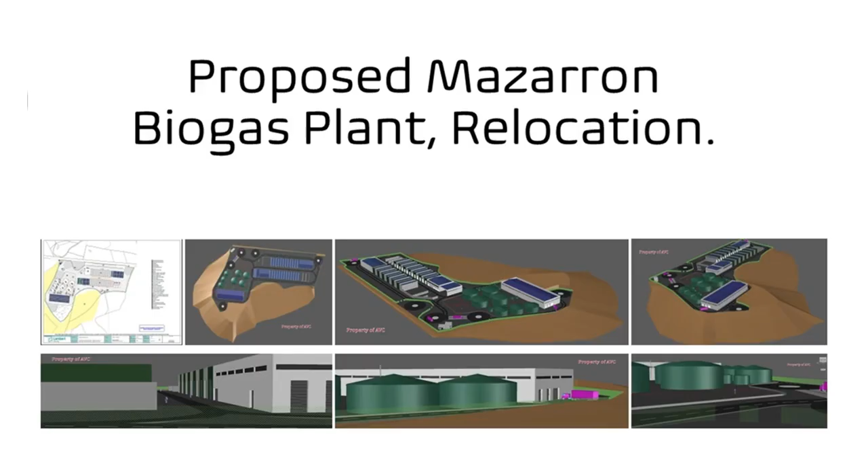The proposed location to construct and operate this biogas installation is far from suitable. The site is located within land deemed within the boundaries of agricultural only operations, not to be used for heavy industrial nor commercial use. This would violate local planning and sustainability regulations, and agricultural or green belt land should not be used to develop in this manner. Once one industrial complex, i.e. the biogas plant, is constructed and implemented, this sets a precedent and opens up possibilities of promoting further industrial and commercial activities in the same vicinity.

From the plans and documentation seen to date, there has been no thought nor consideration to shielding or screening of the site from all aspects of the surrounding countryside. As this installation sits atop a hill, the plant will be dominantly visible for miles around from all directions. A new location must be sought, as the plant lies just 1.15 kilometres from the closest urbanisation of Camposol Sector A.

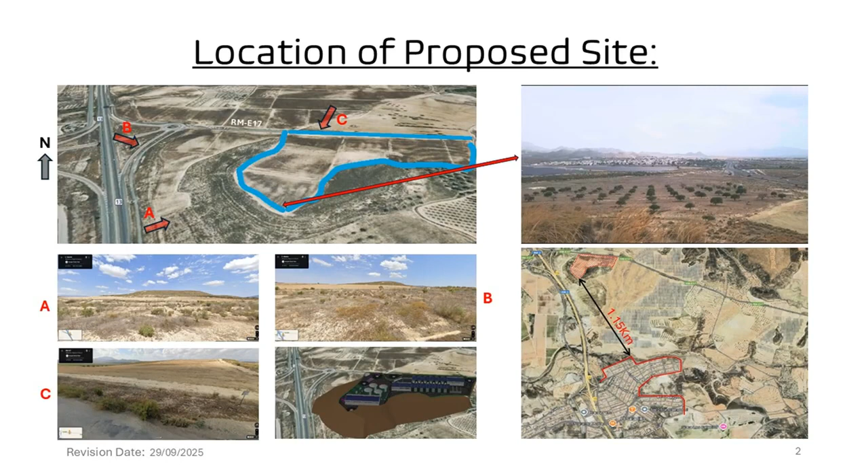Operational disturbance: light, sound, smell and odours. Excessive light. If construction is achieved, other disruption will be created once production commences - excessive light pollution and excessive noise disturbance. The plant will run 24 hours a day, 365 days a year. Every night, large floodlight masts will produce very bright light pollution to the night skies. These lights, like football ground spotlights, will be seen for miles.

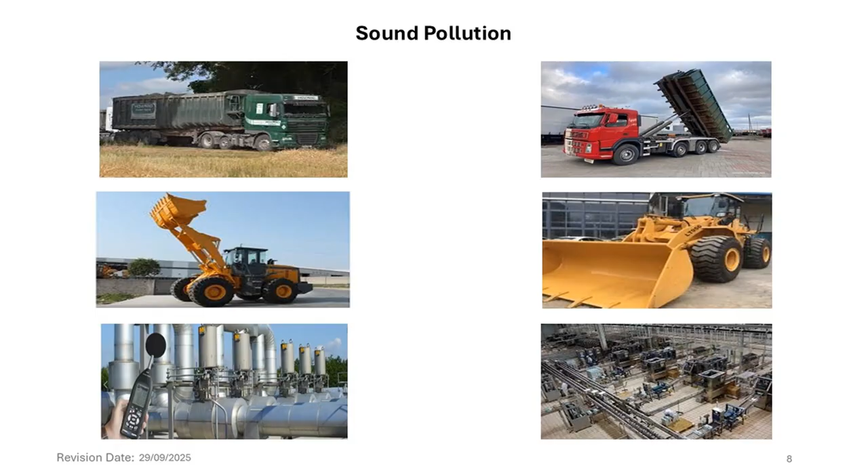Excessive sound will be generated from lorries, front loaders, reversing beacons, and general operational noise from generators, mixers, etc. Although noise calculations and metered tests have been completed in the design specifications, this is just an estimate of the total daily operational noise that will be generated, not the actual volume. In reality, the total amount of extra noise that will undoubtedly travel on the wind will be a significant disturbance for all the residential areas that lie within that wind direction. We all agree that sound travels across the plains of Spain.

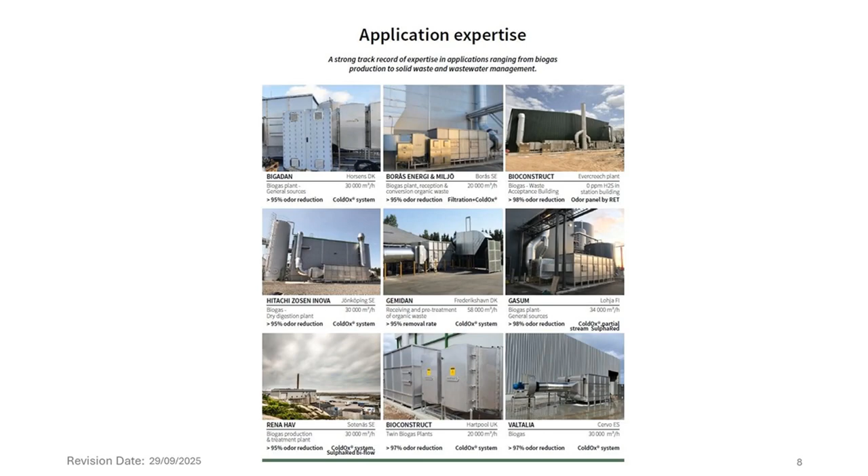Smell and odours: to date, I have not received any drawings or documentation that show or describe the building's internal air replenishment, scrubbing and odour control ducting to be installed to eliminate foul odours and hazardous gases. If these odour control systems are installed and the plant operated correctly to specification, then there should be very minimal to no smell to consider, unless by way of accident or general power failure. The image on screen shows some examples of odour control systems installed by a very reputable company that's been doing this for a very long time, and once these systems are installed, it removes all odours and gases - they get scrubbed, cleaned and release almost fresh air.

Increase in resource usage: potable water and electricity. If this plant is approved, constructed and implemented, daily operations will devour copious amounts of potable water to add to the feedstocks in the digester tanks, as well as for other activities on site like spillage clean down, safety showers, and firefighting.

There is a grave concern as to the total amount of potable water this plant will consume. This feed comes directly from the main fresh water supply that feeds some urbanisations and local villages. Camposol already suffers from a low water pressure issue, and adding extra industrial demand upstream of the urbanisation will only aggravate this problem.

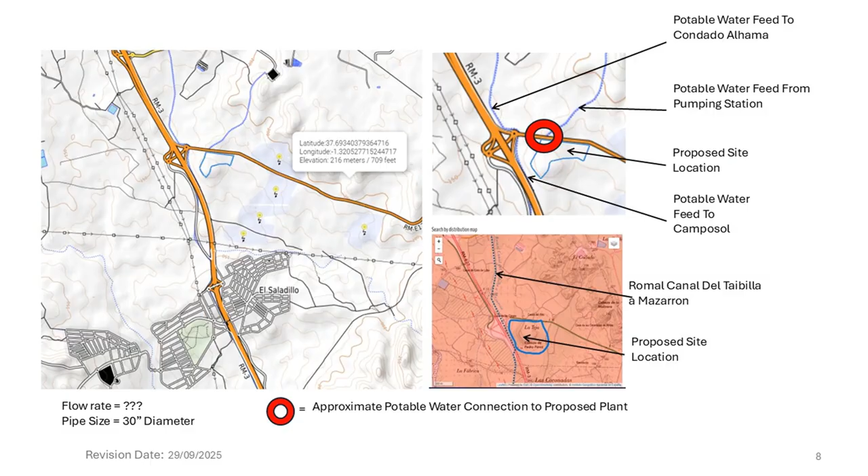Electricity: although this plant has many on-site solar panels to help with its operational electricity consumption, it will also use some of its self-produced biomethane gas to heat the digester tanks. But the plant will still require electricity from the local substation. A 20 kV electrical spur and new power line is indicated on the supplied documentation.

Should another local or national electricity blackout occur, how is this plant going to continue to operate safely? Will there be backup generators on site to supply power during a blackout or grid failure? And will these generators be silent running, so as not to add to the already increasing decibels in the vicinity?

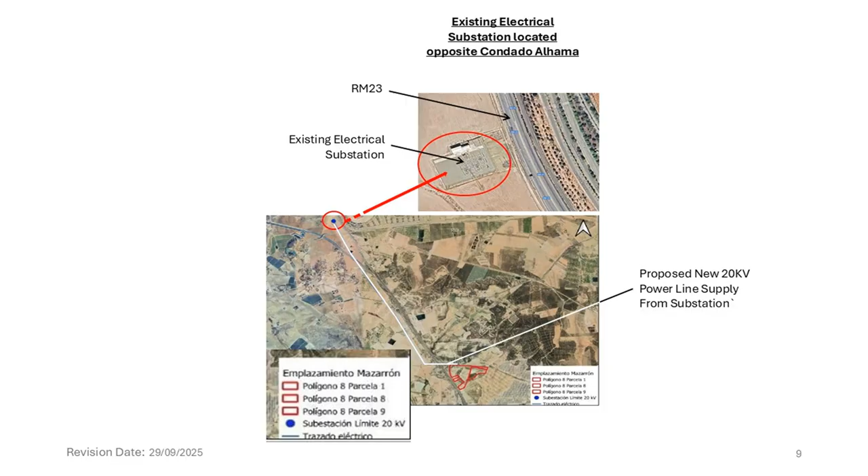As we can see in the image on screen, we have a small local substation. The image below shows the new power line spur feeding the proposed plant.

So 70 lorries, estimated by Lamberts to be arriving and leaving the site per day, could produce roughly 88.2 kilograms of CO2 per kilometre travelled. The estimated travel distance is 12 kilometres from RM3 junction 25 of the AP7 to RM3 junction 13 at the site, and also 12 kilometres from RM2 junction 4 to RM3 junction 13, the site.

HGVs are responsible for more than a quarter of greenhouse gas emissions from road transport in the EU, and over 6% of total EU GHG emissions. The first ever EU-wide CO2 emission standards for HGVs were established and regulated under this EU regulation.

Regulation 2019/1242, which sets a 15% reduction target by 2025, was adopted in 2019. These standards apply to heavy lorries over 16 tonnes with standard axle configurations, which account for approximately 70% of the CO2 emissions produced by all HGVs. The amendments to the regulation entered into force on 26 June 2024.

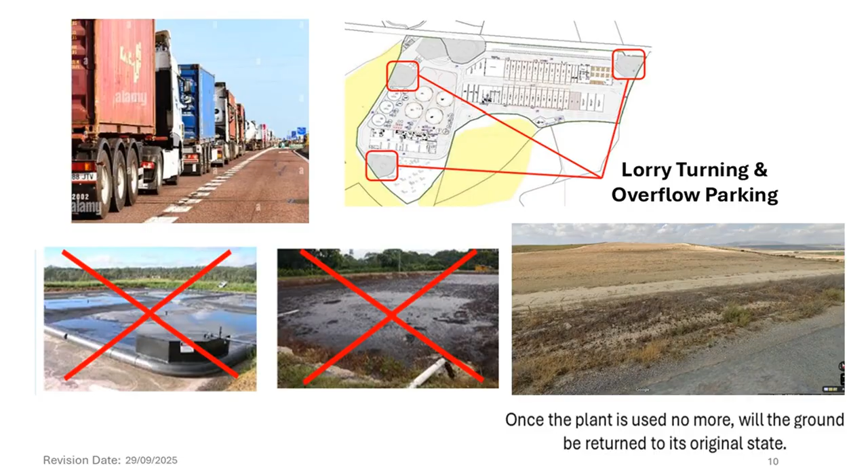Emergency processes and responses. Fire protection and spillage containment. Will this proposed facility have a fire protection ring main around the site? Will this site have an independent fire tender and qualified firefighters to handle any unforeseen fires and or explosions, product leaks or unplanned hazardous gas release?

Are there safety showers on site within the access around the site to shower if an unplanned, unexpected release occurs? Is the perimeter of the proposed site bunded to contain any unexpected product release and eliminate any risk of surrounding ground contamination, making clean-up operations easier?

The plot plans show storm drain infrastructure installed at the proposed site. Will this infrastructure have contaminated matter collection and cleansing of water for reuse, or will any storm water be collected and reused in daily operations?

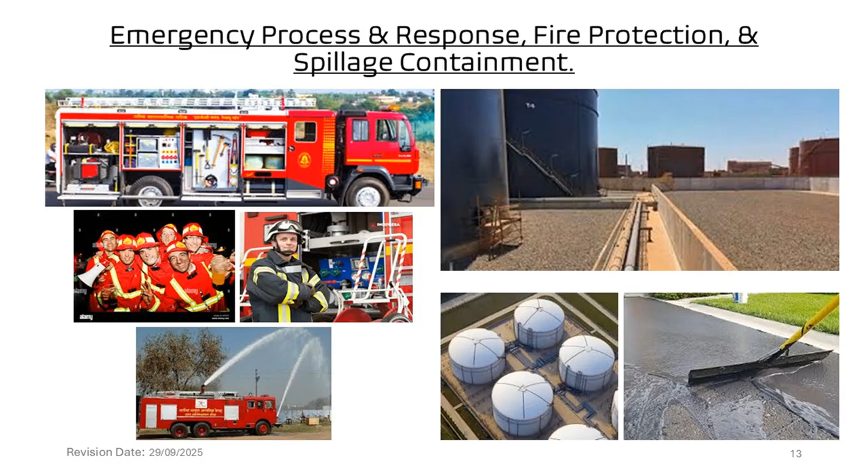Compensation to local councils or residents, farmers for plant acceptance. A biodigester plant is an excellent addition to a green cause for producing biogas and fertilisers from existing waste products. The plant proposed for the Mazarrón area will clean up the air and waste from pig farms and arable farms alike. If local farmers supply their waste for free, do they get in return fertiliser for free or at a discounted price? As for local residents, how will they benefit directly from having a huge industrial complex on their doorstep and having to endure the side effects of this operation?

The gas products produced here in Mazarrón are going to be sent up the line to be sold to other regions of Spain and maybe even sold internationally. This is great for the residents that live in cooler climates around other regions of Spain, but the good residents of Mazarrón will not benefit anything in return for the plant being built here. Other than a few permanent jobs, a majority won't benefit from gas nor fertiliser.

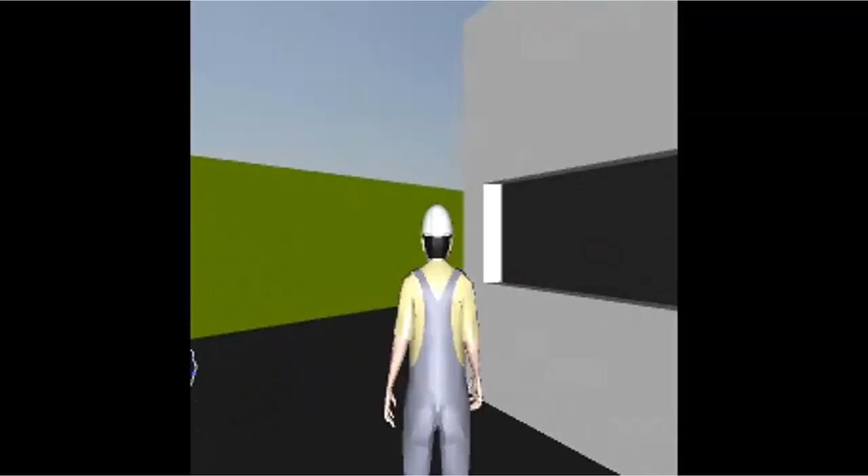This is a 3D animation to give you scale of a walk round of a finished plant. As you can see, the digester tanks are huge. There are an existing proposed 4 digesters with a proposed expansion of an extra 2 digesters on site.

The avatar is now looking at the feedstock arrival processing building. This should be hermetically sealed and the air replenished from scrubbing air conditioning. As you can see, it's quite a large reception building.

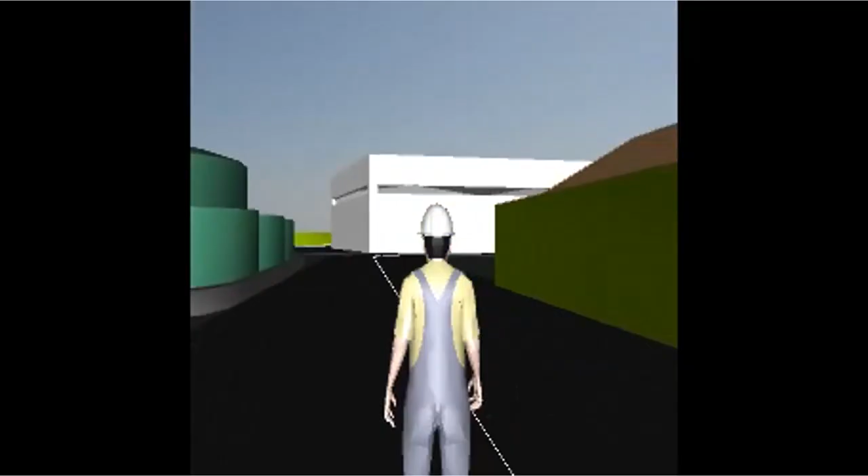Okay, we're arriving at the finished dry fertilizer storage pens and yards. As you can see, this corridor is full of solid fertilizer or pelletized fertilizers in their dry form. And this corridor is quite long, containing lots of buildings. So the production of fertilizer is going to be incredibly huge.

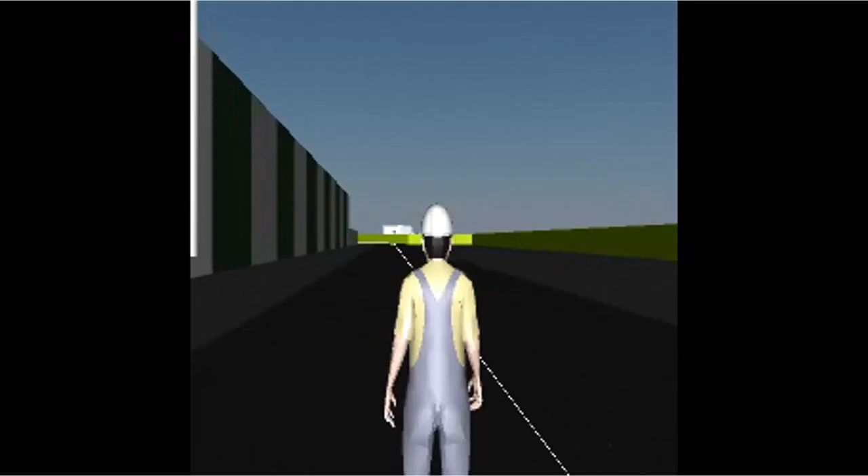As we head back towards the tankage area, you'll see the biodigesters, also the slurry tanks for the wet fertilizer. There we are. So these are the secondary digesters or slurry storage.

So you can see it's an extensive site, and this is classed as a medium-sized plant. Some biodigester plants can be incredibly large, but it's still too big for Camposol and Mazarrón.